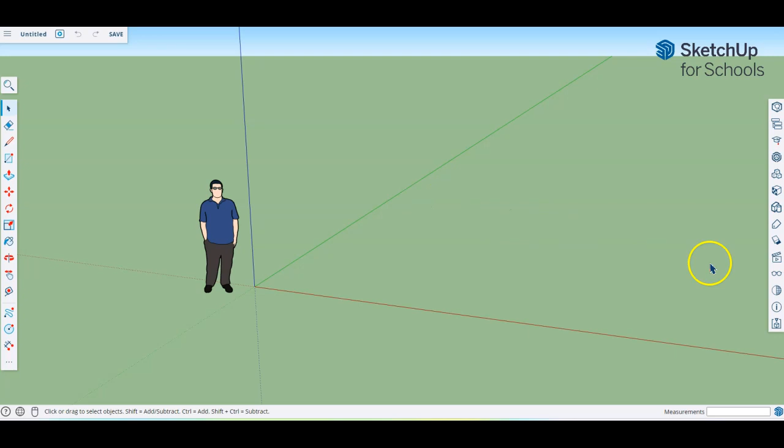In our new SketchUp, remember we should always start by checking our measurement, looking in the information at length units, making sure it is set to millimeters, and usually 0.0 is sufficient for what we need. We can close it off once it's done, and I tend to get rid of the person straight away.

If we jump back for a second and look at the design, we have three main pieces that make up this design. We have one side which is 100 millimeters long by 12 millimeters wide, and that's going to have the rebates cut into it. Then we have the other piece that goes between the two rebated sides, which will be 88 millimeters long to give a total of 100, and is also 70 millimeters tall. Our final piece, of course, is the base, which we'll worry about in a second.

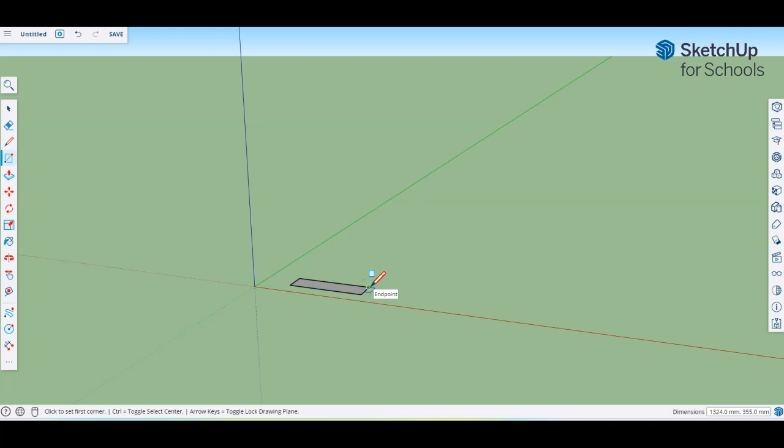So let's start by drawing the most complex piece, the piece here with the rebate. Jumping back to my new one, I'm going to start like most things and think about modeling the shape I want. So I'm going to start with a rectangular shape, which I'm going to make 100 millimeters long and 12 millimeters wide. Pressing enter, it looks like it shrunk a lot, so I'm going to zoom right in.

Here is my piece. From there, I'm going to take my push-pull tool and bring that up to be the 70 millimeter height that I need. So I've essentially replicated a piece of material—it could be a piece of wood or plastic or anything else—that's going to now have rebates cut in.

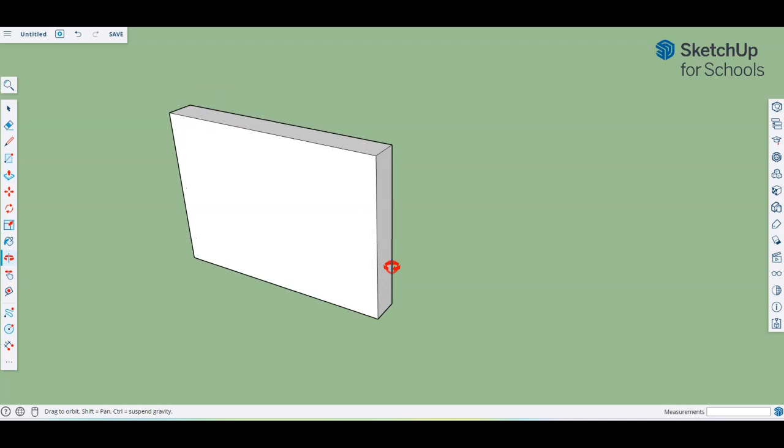So let's have a look at doing those rebates. Very much like we would have done in class on a real piece of material, I'm going to start by measuring in from the edges the amount that I need for this rebate. We know the amount because it's the same as the thickness of the wood, which is going to be 12 millimeters.

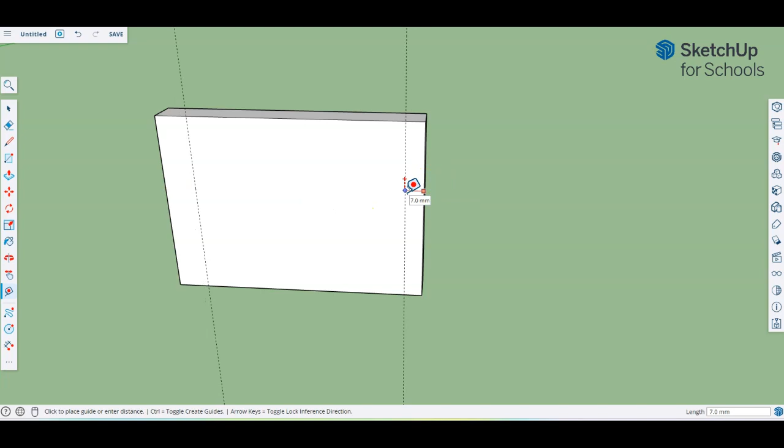So I'm going to use my tape measure and create a construction line that is 12 millimeters from the end. Again, I'm clicking, dragging in the direction I want, typing my value, and pressing enter to get a perfect measurement—similar to how I'd do this with my real piece, where I'd get a square to get the line going across.

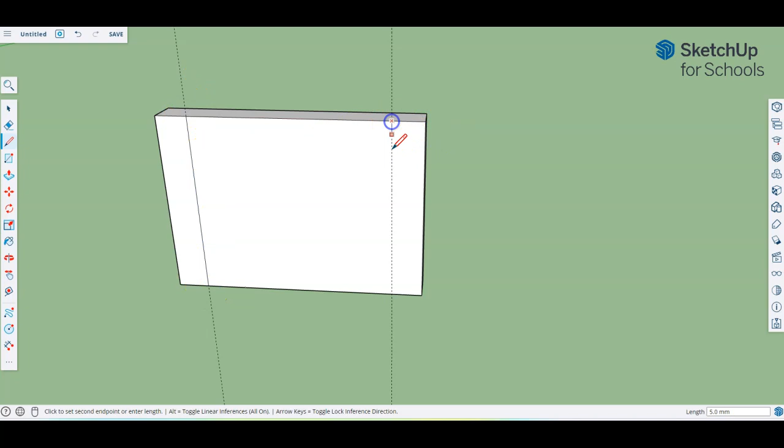I've got my line, but I need to actually draw a real line now. So I'm going to use the 2 points where the construction line joins the edges to mark in an actual solid line, which now gives me separate pieces. At this point, I can rub out the construction lines, leaving the actual lines behind.

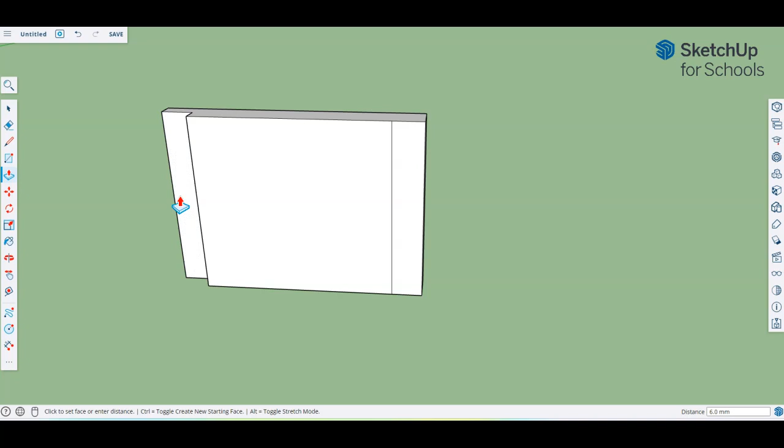Taking my push-pull tool, I'm going to choose one part of the rebate, push it in, and type the distance, which is always half. Again, because our material is 12 millimeters, that will be 6. Pressing enter, and doing the same on the other side. Press enter, done. So I have actually finished the entire rebate side.

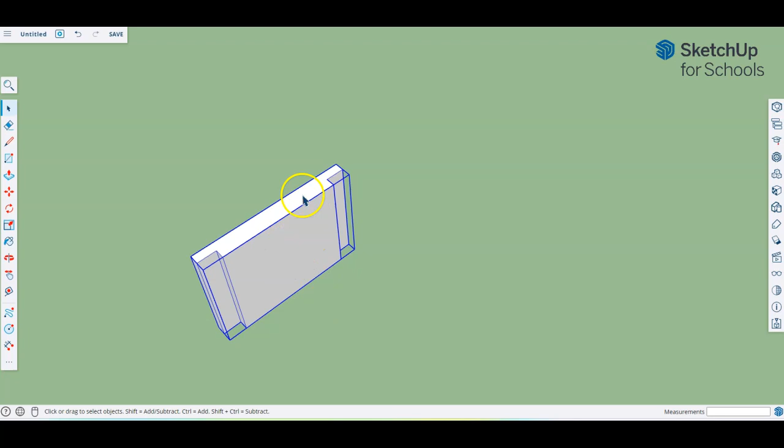Now we should always make this into a component. So let's quickly select everything, right click, and make a component. I'm going to call this the rebate side, typing in and pressing enter. Now I'm going to need 2 of these, so I'm simply going to copy and paste one straight away.

I prefer to use the keyboard shortcuts. Try that again, copy and then paste. I've got a second one there. Problem is, of course, it's facing the wrong way—I want them facing towards each other.

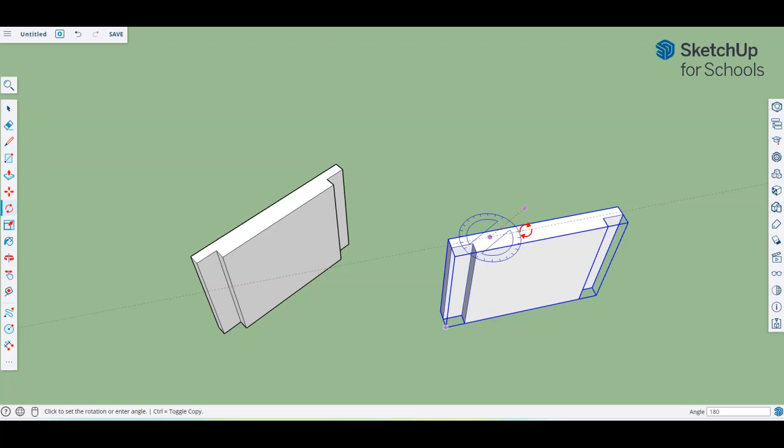So I'm quickly going to take my rotation tool. Again, I want to rotate on this axis. So here we go, clicking 1, 2, rotate any amount. I know I want to rotate 180 degrees, so it faces the exact opposite direction. Let's type it in and press enter. Now I've got the 2 facing in the right direction.

Let's design the other piece. Again, taking my rectangle tool, I'm just going to move it a little bit out of the way for a second, and start with the basic shape. Here it is—I want, sorry, not 100, 88 millimeters.

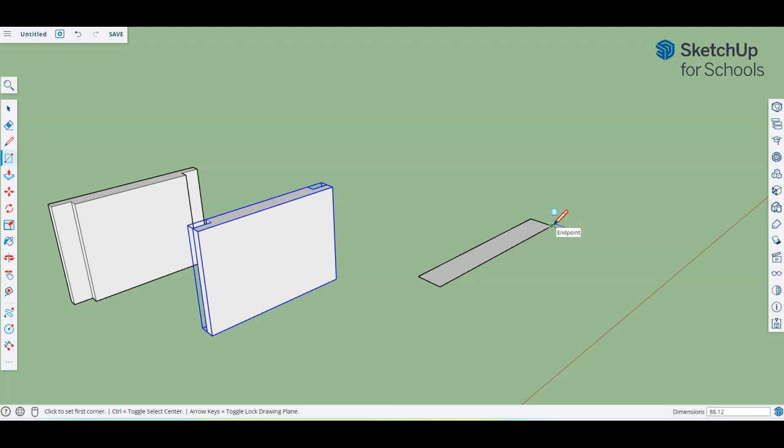Still by 12 millimeters to be the right size. Press enter. And again, I want to pull it up to be 70 millimeters tall. Let's make a component out of that.

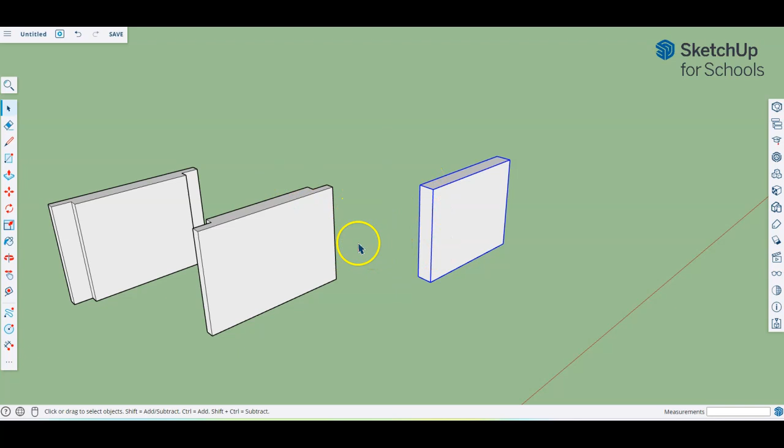Highlighting everything, right click, make component, and I'm going to call this the non-rebate side. Okay, and again, I'm going to want 2 of those, but before I make a copy, I'm going to be a little bit smart here, and think about rotating it first.

So I want this piece to go across between the 2. I'm going to rotate it on that blue axis, but this time by 90 degrees, so it's facing in the right direction. Now that it's facing the way I want...

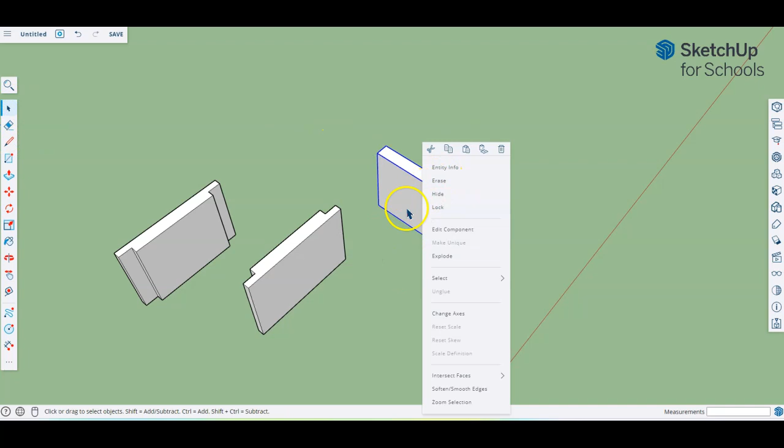I will highlight it and copy and paste. I could copy and paste that way, or I can use the shortcut keys. Let's bring that one over here. All right, so basically got all the pieces now.

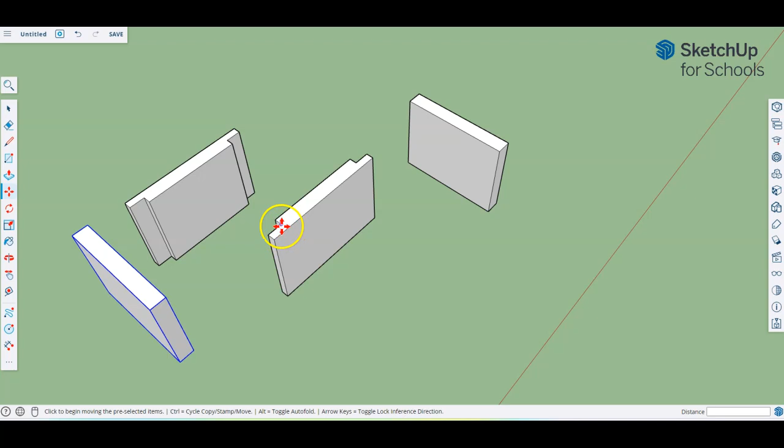It's time to lock them together. We know from previous experience that we can use the move tool and lock different pieces together. So if I think about this corner right here, that's going to lock to this corner right there. If I grab that corner and bring my mouse, I can lock it into place.

In a similar way, this corner here is going to lock to the inside corner of that rebate. So let's grab it. Oops, sorry, I had the other one still selected. Let's undo that, make sure I'm choosing the right piece, and lock that into place as well.

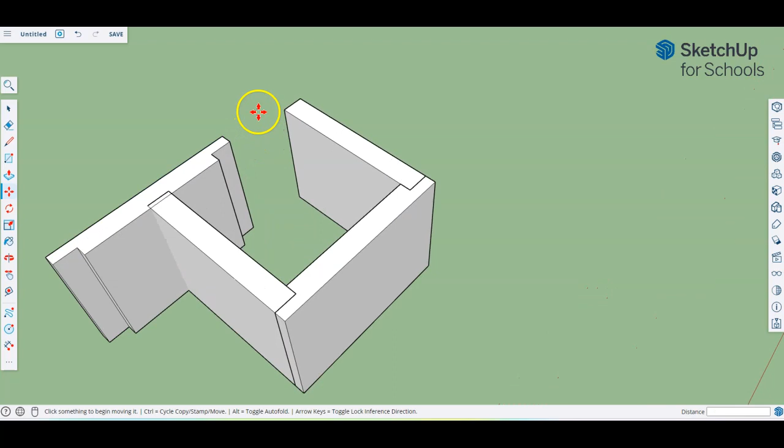And finally, the last side with the rebate, same thing, I can lock any piece together. I'm going to zoom in a little bit closer and lock this inside corner to that corner there. So again, grabbing the piece, bring it in and locking it into place.

So I've now got my fully designed outer box. Last thing I need is a base. Now the easiest thing for the base here is to simply rotate around to see the bottom of it.

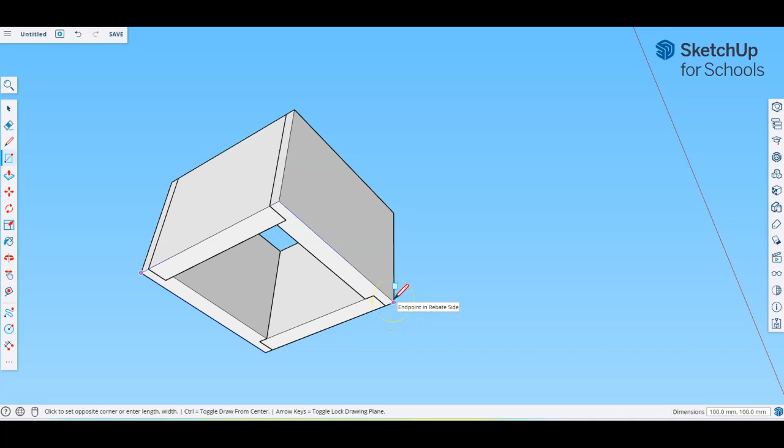I'm going to take my rectangle tool. I'm going to grab any outside corner and go to the opposite diagonal corner to create a full piece there. Remember, it's not joined onto the box because each of these are components, so it's sitting on top of them, so to speak.

So I can take my push-pull tool, grab it and drag it down any amount, but we know it's 3mm, so I simply type 3 and enter, and I've made a base piece. I should make that into a component as well.

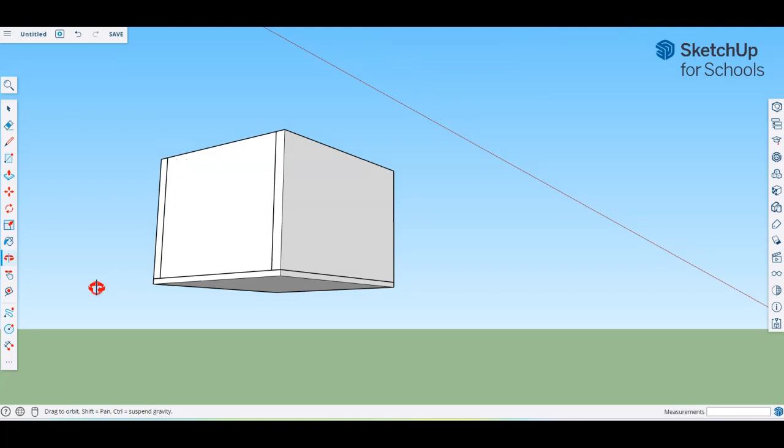So what I might do at this point is hide all the other pieces, just right-click hide as I go through all 4 of them. This way I can definitely select just the base pieces without accidentally choosing the rest of it. I can right-click and make that a component as well.

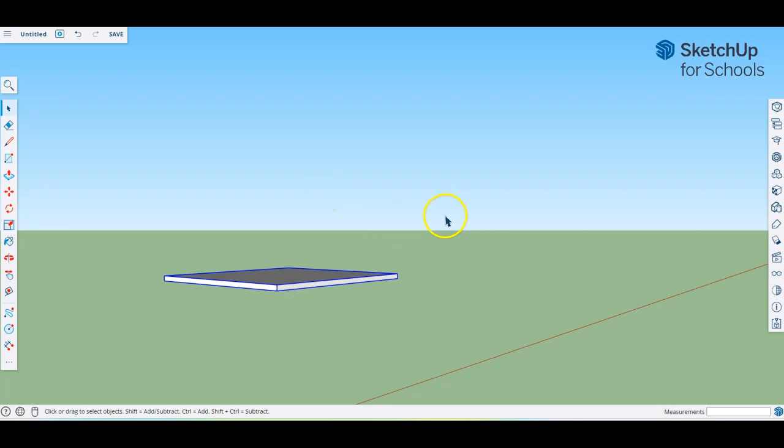We'll call that base. And of course I can bring back all the pieces simply by going to my little pair of glasses and choosing to unhide all. And I now have all the pieces of my box.

If I wanted to try and replicate that last stage that I have here, I can use my dimensions tool. So going into your 3-bar menu if you don't already have it, but you're looking for this tool here. If it's not on your bar already because you used it recently like I have, you'll find the dimensions there. And remember, with dimensions, you take 2 points.

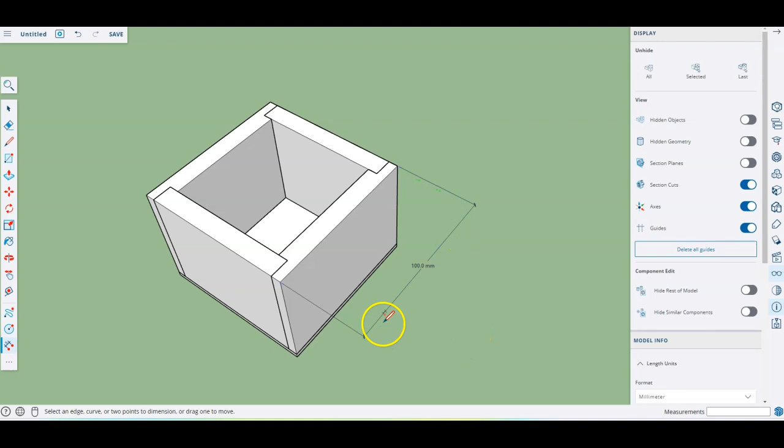So let's say I want to have the full measurement across here. I can click on this first corner, second corner, and then bring out that dimension to a place that I can see it nicely. So you can see that is 100mm. If I go all the way from edge to edge, that's also 100.

But if I then look at the piece in between, say here, it's definitely 80. I can do the height, so from the bottom of the piece across, that's our 70mm. And if I zoom in nice and close, maybe rotate a little bit, I can test just that little piece there, and that's definitely 3.

So you can add some dimensions to your box as well to make it clear that you've definitely got it correct. And that is how to make the box.